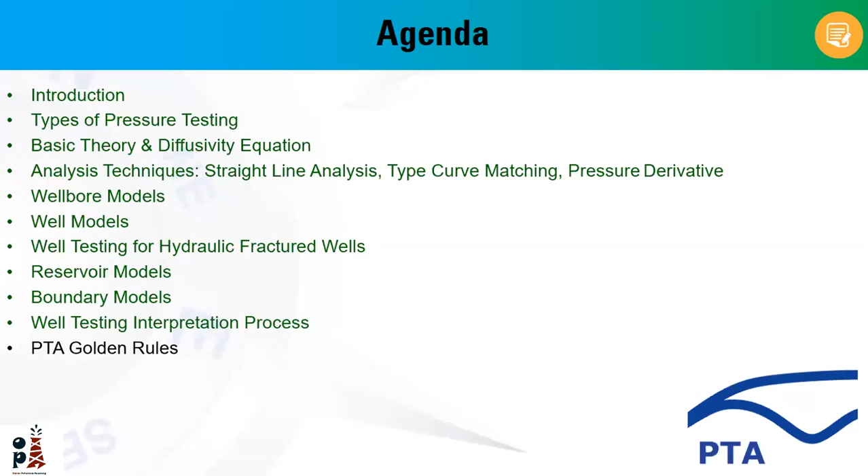After that, the well testing interpretation process and reservoir modeling, what's important to know at this stage, and finally the pressure transient analysis golden rules you have to follow while working in pressure transient analysis and while modeling your pressure data.

So now, what is reservoir engineering? At first, reservoir engineering is basically a branch of petroleum engineering which is concerned with handling the problem of fluid flow in a porous medium.

As you can see, if we consider a unit volume of our reservoir, we have a matrix block and pore spaces in between. Within the pore spaces, we probably have reservoir fluids such as water, oil, and gas.

The basic principles for any reservoir engineering application: the first one is Darcy's law of flow, or the flow rate equation, as we consider fluid flow in a porous medium. So the first principle for almost all reservoir engineering applications is Darcy's law. As we produce from a specific subsurface volume or store, we have to apply the second principle, which is material balance or the continuity equation, such that the remaining volume will be the initial volume minus the produced volume.

And the last one is the equation of state model, or PVT properties. Basically, reservoir fluid properties like reservoir density, reservoir viscosity, and so on are typically dependent on reservoir pressure. So while producing the reservoir, the pressure declines from the average reservoir pressure to the downhole pressure and then to surface or wellhead pressure. So it's important to characterize the properties of reservoir fluids during production using the third principle, which is the equation of state model.

For complete system analysis, as you can see, if we consider the fluid flow from the bottom of the reservoir to the bottom of the well, up the production tubing, and then the wellhead, and as you can see, surface connections, processing facility, separators, and finally transportation.

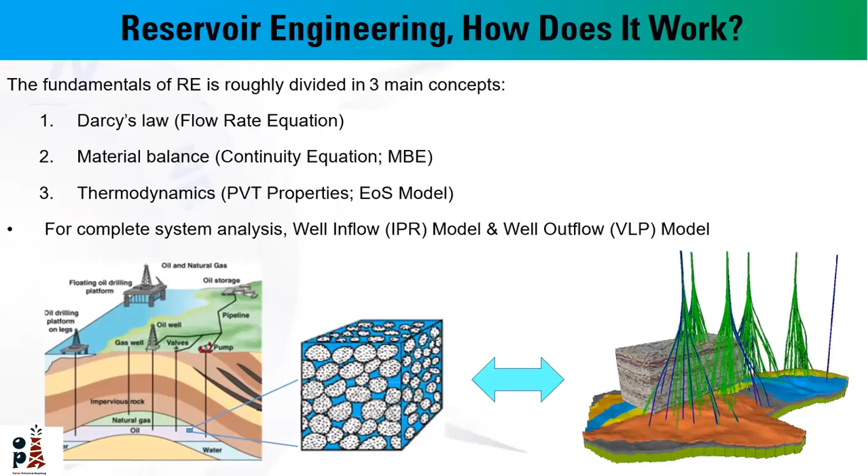We also consider two additional models: the well inflow model, or IPR model, to characterize the movement of fluid from the reservoir to the bottom of the well. And the second model will be the well outflow or VLP model, to characterize fluid properties during production while moving from the bottom of the well to the wellhead.

So again, what is well testing or pressure transient analysis? Simply, it's a signal sent to the reservoir. This signal is created by controlled opening and shut-in of our well, typically using surface control. During the test, we create a pressure disturbance using a specific sequence of opening and shutting in the well, and the response, which is the pressure transient, will be recorded.

So the recorded pressure transient will give us information about the near wellbore region at first, and then the reservoir properties, like reservoir permeability, transmissibility, and so on. And finally, the reservoir boundary in terms of the distance to the boundary, type of boundary, and reservoir connected volume.

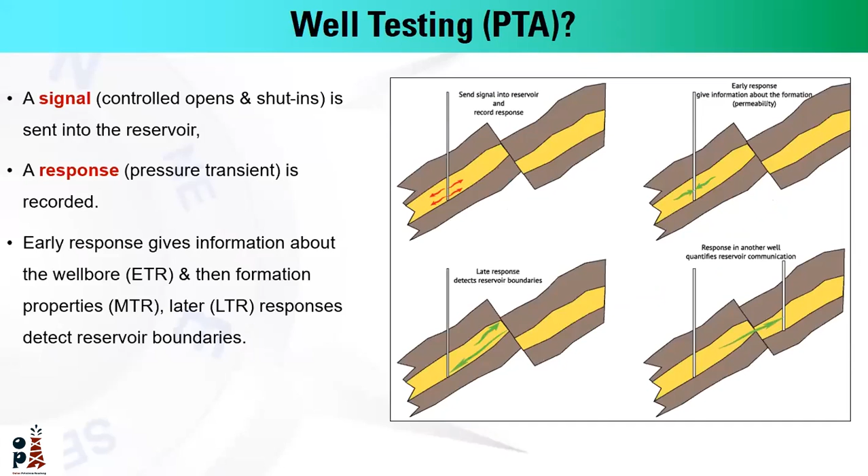So simply, we create a pressure signal by controlled shut-in, build-up, and drawdown. The early signal response gives information about the wellbore and reservoir. A late response gives information about the boundary, and for long test periods, we can see reservoir communication with other wells in our field. So as you can see, we have pressure response recorded versus time, and we have recorded flow rates versus time.

The near wellbore effect is probably relating to wellbore storage and skin, the evaluation of the presence of formation damage, or evaluation of the treatment operations. For the middle time region, we can give more information about the reservoir properties in terms of reservoir heterogeneity parameters, and finally the reservoir boundaries, pressure, shape, and volume.

Applications of pressure transient analysis in exploration involve the determination of reservoir volume by information from boundary response and hydrocarbon type or productivity.

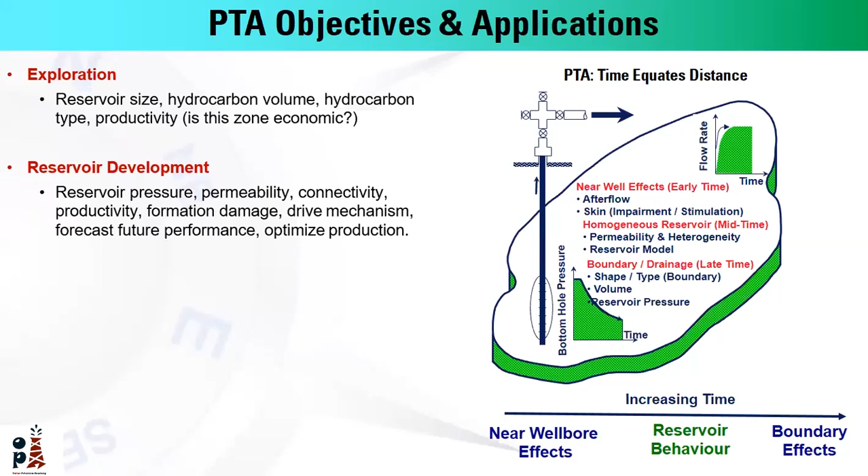Application in reservoir development, which is very important to reservoir engineers, is the determination of reservoir pressure, reservoir properties like permeability, formation damage, and how to optimize production processes by knowing more about the productivity of our wells.

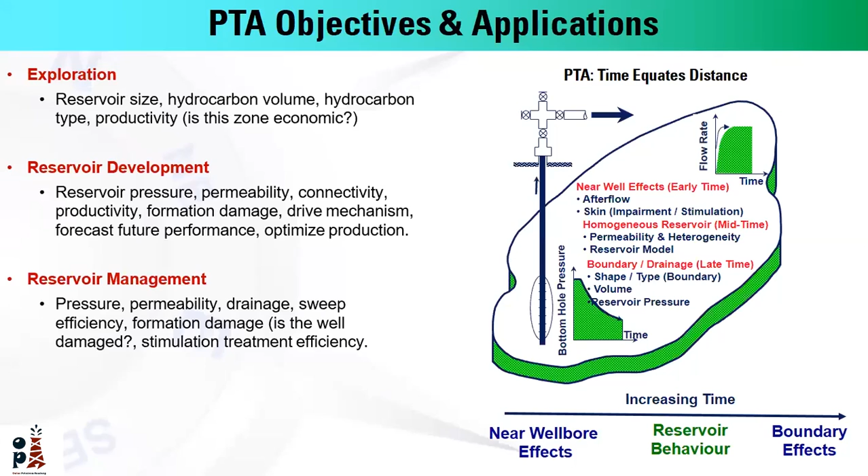And last, in the reservoir management stage, applications of PTA will also include determination of drainage area of our well, evaluation of the stimulation treatment efficiency, and identification of the formation damage.

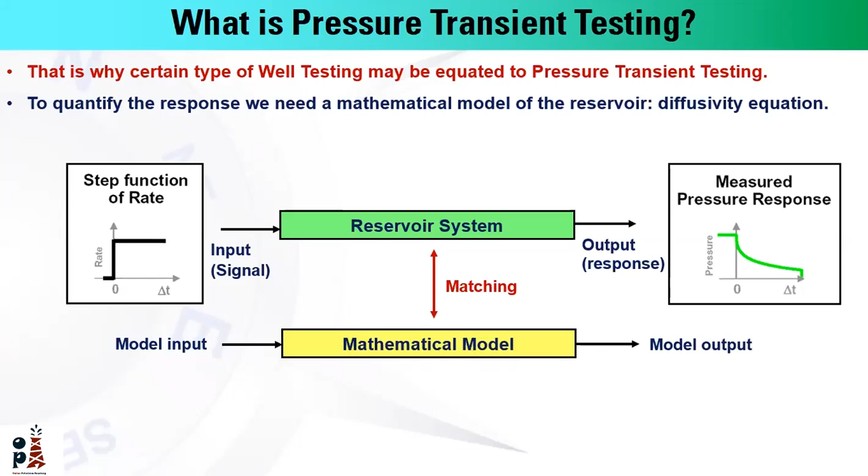Starting from the downhole, we have a main memory gauge to record pressure and temperature versus time. Then at the wellhead, we have a choke manifold and then the separators. On the wellhead, we have different measurements of surface pressure, wellhead pressure, upstream and downstream pressure, fluids, separator or surge tank, and we can also get fluid samples for analysis.

This is the period of testing and acquisition. In the interpretation stage, we almost always have a workstation or specific software like Saphir or alternatives like IHS, and this software is used for loading our data and making the analysis or interpretation of our model.

The main required data for performing a pressure transient analysis is the flow rates, recorded pressure, reservoir fluid properties, and other data like reservoir parameters such as porosity, and well configuration like well radius, and so on.

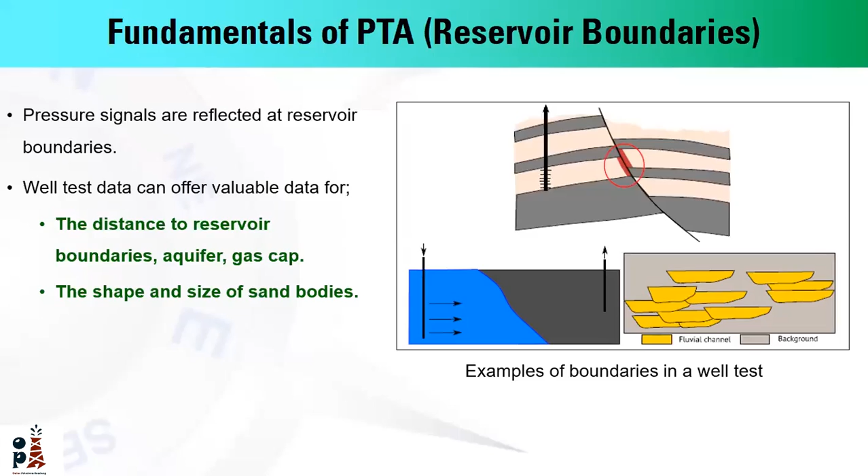The objectives of pressure transient analysis are mainly to evaluate reservoir properties like reservoir permeability, skin, and fracture half-length, and so on, and to get an estimate of the reservoir pressure, whether initial or average. The second most important objective is to get an estimation of the reservoir volume, shape, and boundary distance.

The main inputs for pressure transient analysis will be bottom hole recorded pressure, BHFP (bottom hole flowing pressure) or BHSP (bottom hole shut-in pressure) in case of drawdown and build up respectively, and on surface, we have surface measurements of flow rates. We also need fluid data like reservoir fluid parameters, formation volume factor, viscosity, and compressibility. The last important input is the well configuration and well geometry.

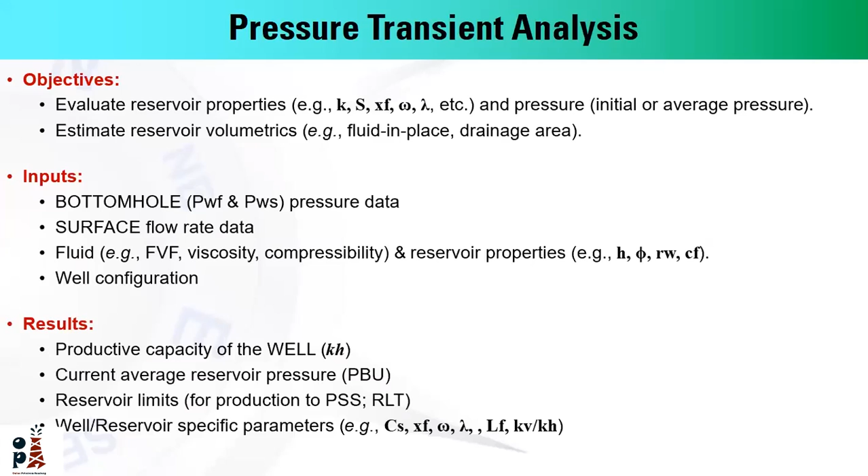The result, on the other hand, will be the identification of production capacity of our well, the estimation of average reservoir pressure, determination of reservoir limits, and reservoir specific or well specific parameters.

Again, our interest is the bottom hole pressure, which is recorded with high frequency and high resolution, almost one pressure recording every 3 or 5 seconds, and surface flow rates recorded on an hourly or half-hourly basis.

This is a simple testing design. We have cleaning at first, after making a perforation of our interval, then a build up interval, and two drawdowns.

Most probably, the commonly used well testing program, as you can see, we have initial flow after cleaning to evaluate the productivity of the well. Then initial shut-in to ensure the reservoir pressure is back to stabilize, or the initial reservoir pressure. As you can see, we have fluids in this curve, and at bottom we have recorded bottom hole pressure. In this period, the pressure is held constant as the initial reservoir pressure, while for the initial flow, we have the first ever drawdown recorded in this well. Then the initial shut-in to ensure the stabilization of our pressure. Then we have a series of increasing fluid or increasing choke sizes, and finally extended flow period to ensure stabilize the flowing condition, and finally final build up to evaluate and make well testing interpretation.

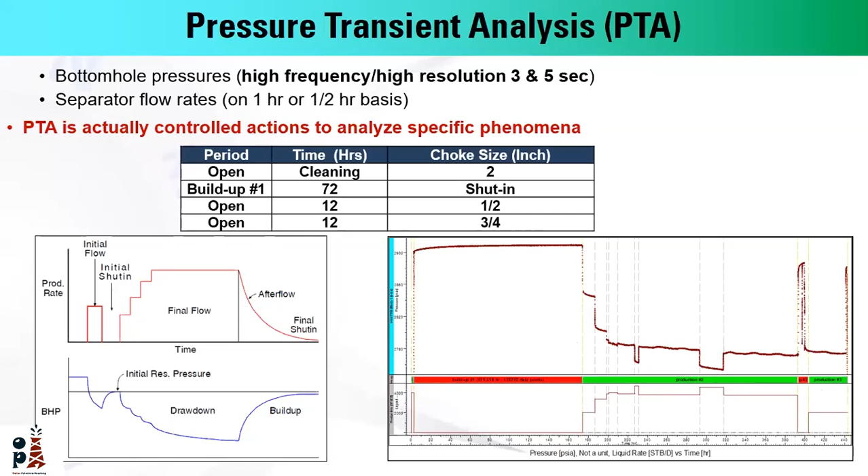The design of well test, as we will discuss at the end of the session, will be dependent of the reservoir fluid type and the required parameters you have to know about your well. Right now, it's important to understand what are the required well testing facility, well testing equipment while performing well testing, while performing pressure transient analysis for an oil well, for example.

So as you can see, this is an overview of surface well testing equipment, starting from bottom to up. We have a completion string equipped with memory gauges to record the pressure versus time, the pressure and temperature versus time. At the wellhead, we have the Christmas tree, then the choke manifold, then flow meters, then a 2 or 3 phase test separator, and then surge tank, and finally to the flare or the burner, as you can see.

So the basic components, the most important surface equipment facility required while performing well testing, are the Christmas tree, choke manifold, flow meter, test separator, and finally surge tank.

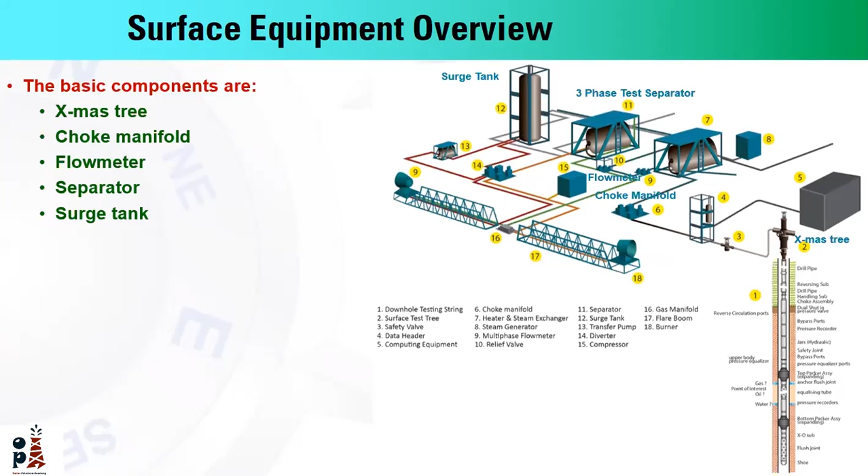Here again, focus on the downhole equipment. We have a packer and memory gauge to record the pressure. As you can see, we have recorded pressure versus time against the production, the formation, the production or tested formation.

And on surface, we have surface measurements after the test separator. We have recorded surface pressure and the surface flow rates.

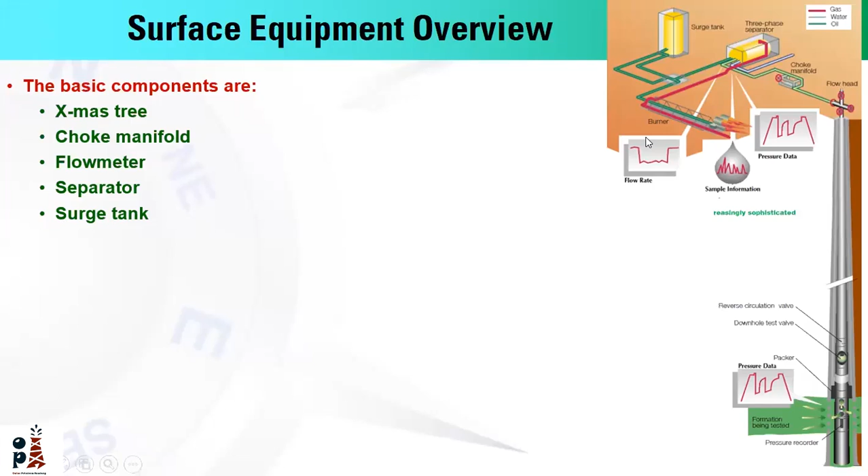The most important surface equipment, starting with choke manifold. The main function of choke manifold is to control the production rate while testing, by using fixed or adjustable choke sizes. So the primary goal is the flow control of the well.

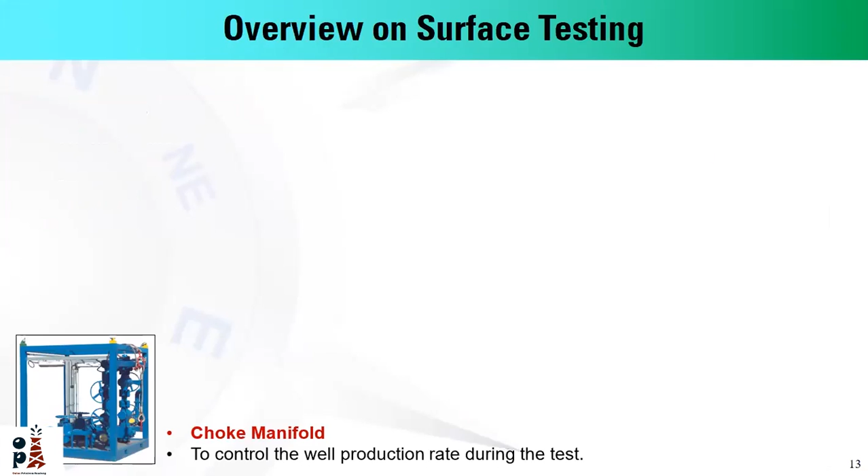The second important surface equipment is the test separator. We probably have at least 2-phase or 3-phase test separator. The main function of this is to make separation and metering for the produced fluid. We almost have separation of water as a separate phase, oil or condensate, and the main function of the surge tank is the flash of any dissolved gas in our liquid, and accordingly identify or determine the correction, the meter correction factor for the measured flow rate.

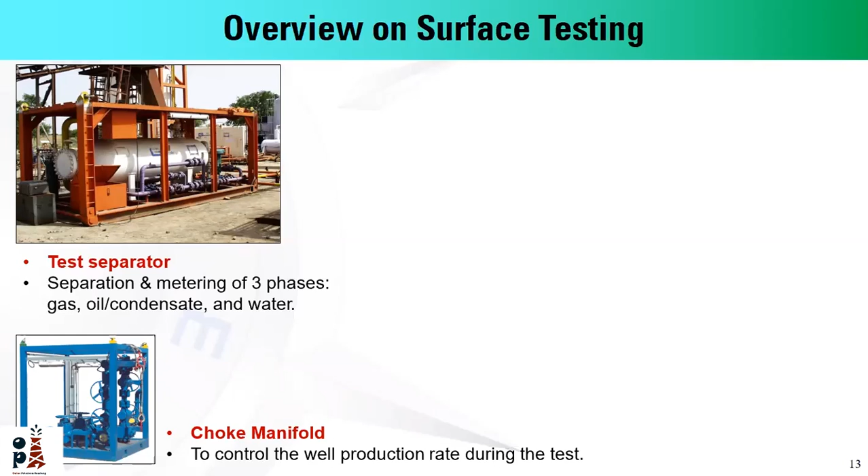And the first test we almost have for production wells is the drawdown test. The drawdown test by definition means we are producing our oil at a constant flow rate starting from time zero after a stabilization of pressure.

And versus time. The second type of well test for production wells is the build-up test. Build-up test simply means shutting in our well after production at constant flow rate and measuring the resultant pressure response versus time.

On the other hand, for injection wells, we have the injection test. Injection test, like the drawdown, while we are injecting water, for example, injecting fluid at constant flow rate starting from time zero and measuring the pressure response versus time.

And similar to the build-up test, we have the fall-off test, injection fall-off test, which is conducted by shutting the well after injection at constant flow rate, and the pressure response is also recorded versus time.

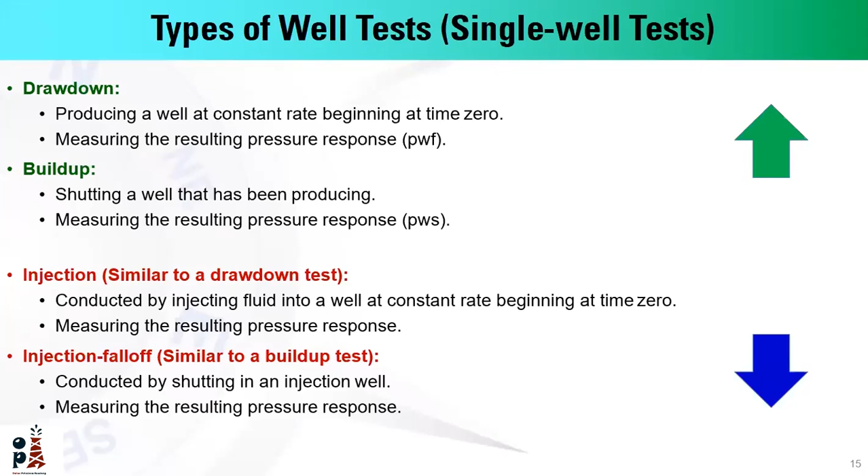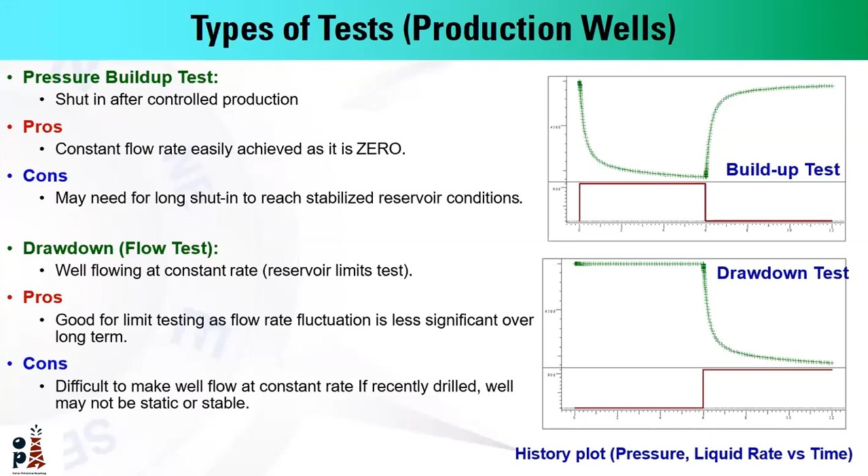While for drawdown, as you can see, we have a stabilization in pressure, and then the drawdown by letting our well produce at constant flow rate. It's a very important test to identify reservoir limits and reservoir volume, but the cons of this is it's really difficult to keep the flow rate constant, held at constant value, because any fluctuation in flow rate will typically distort the pressure transient.

Therefore, in this case, most well testing interpretation will be performed on build-up, due to the data having high accuracy with no noise. It's simply easier to keep your well producing at constant flow rate, which is zero flow rate—it's really applicable to make this, while for drawdown it's difficult to maintain your well producing at constant flow rate.

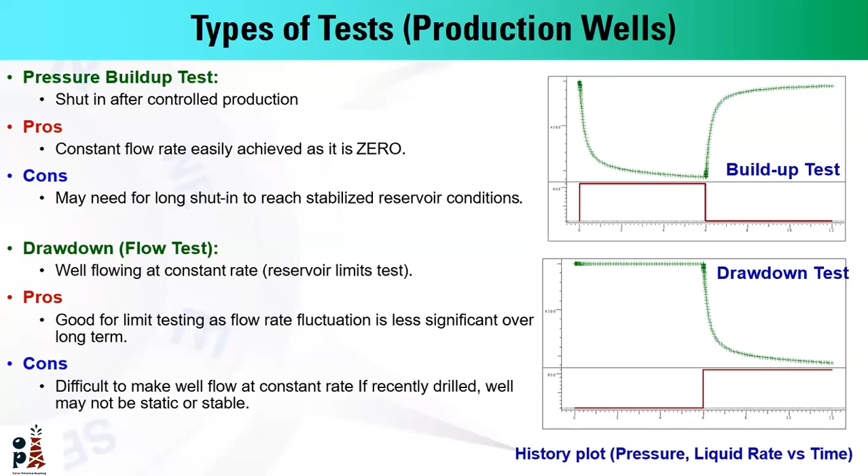So for gas wells, we typically have two different types of tests. The first one is the isochronal test. The isochronal test basically involves flowing our well at different flow rates of equal periods of duration, while the last one will be an extended flow rate to reach stabilization in the flowing conditions.

And in between, we have shut-in periods. The time period of the shut-in will typically depend on the reservoir parameters, and the length of the shut-in period will be designed to let the pressure transient reach the static reservoir conditions.

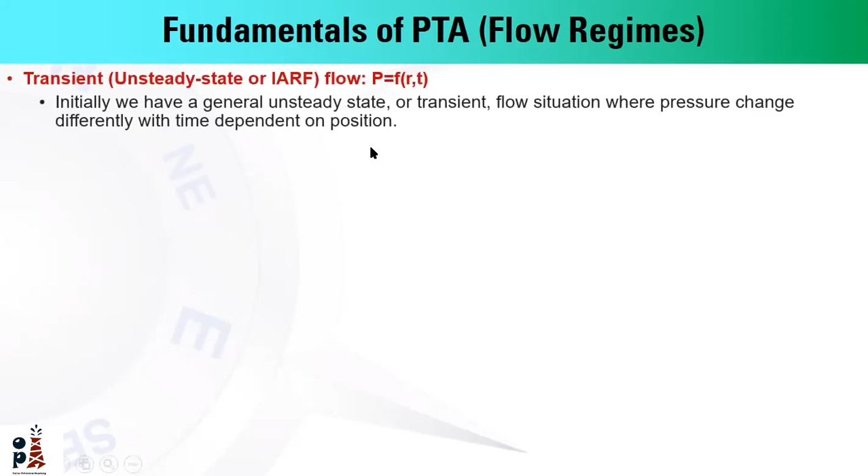The first flow regime for any production well will be the transient or unsteady state flow, in other words, IARF, infinite acting radial flow. In this regime, the relationship of pressure with time, partial P over partial T, will be a function of R and T, function of the radial distance of the well and time. In this flow regime, the pressure transient simply doesn't reach the boundary of our reservoir.

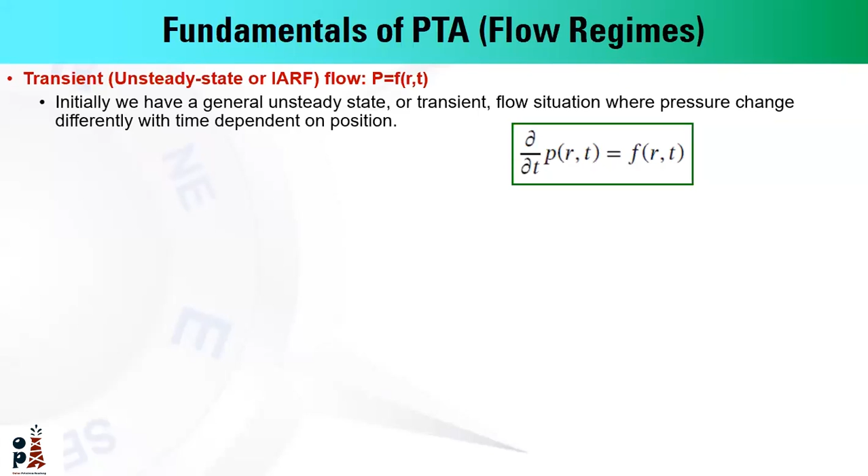The second flow regime is the pseudo-steady state flow. In this regime, the relationship of pressure with time, partial P over partial T, will be constant, which means the pressure changes at every point throughout our reservoir at the same rate. This is very important to identify the reservoir shape, reservoir volume, and reservoir drainage area.

The last flow regime is the steady state flow. In this regime, the change of pressure with time will be zero, meaning no change in pressure with time. Specifically in this type of flow regime, we probably have strong support of reservoir pressure, like a strong aquifer or active pressure maintenance operations like water injection and so on.

So simply we have three different flow regimes applied in well testing interpretation: transient, where partial P over partial T is a function of R and T; pseudo-steady state or boundary dominated flow, where partial P over partial T is constant; and steady state, with no changes in pressure with time.

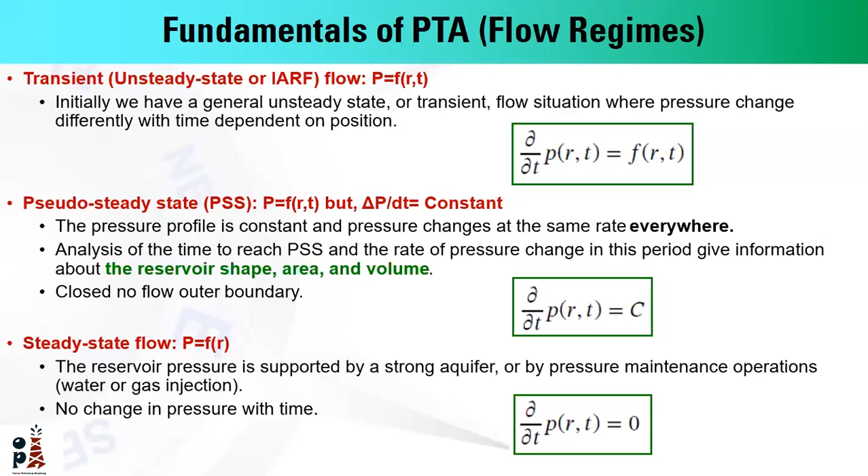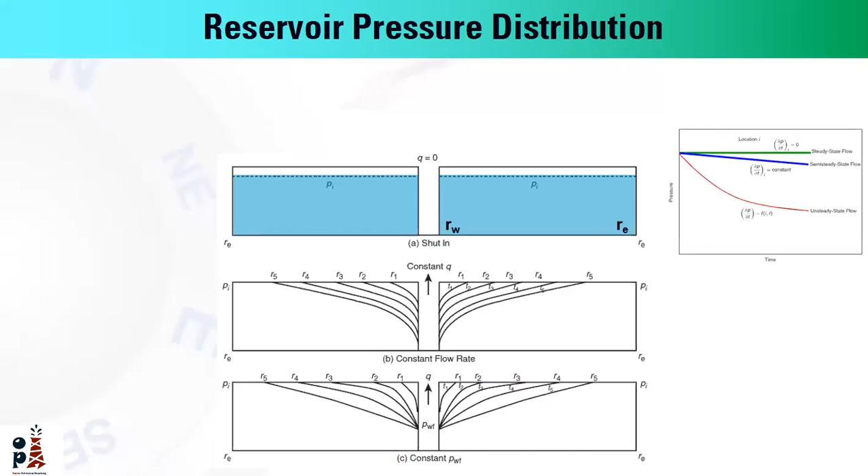If we consider this well is allowed to produce at a constant flow rate, in other words, we are creating a pressure disturbance at the well at the sand face.

This pressure disturbance will move away in the reservoir based on the reservoir properties, and the rate of movement of the pressure transient will typically depend on reservoir parameters like K and phi, reservoir porosity, permeability, fluid viscosity, and total compressibility.

This means at time T1, the pressure transient will reach a radial distance of R1, which is the drainage radius or radius of investigation at this time. At time T5, the pressure transient will reach the radius of investigation as R5, and so on.

As long as the pressure transient doesn't reach the reservoir outer boundary, we are talking about the transient or infinite acting radial flow, in other words, the reservoir acts as if it is infinite in size, meaning mathematically that RE, the outer radius of our reservoir, is infinity.

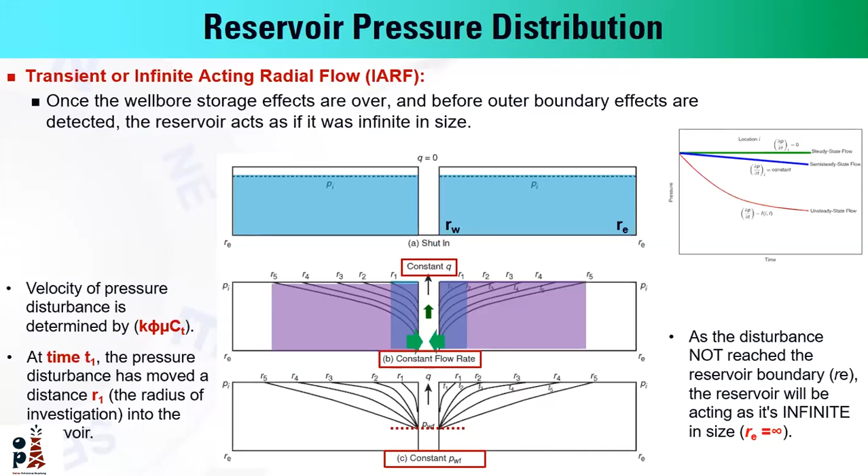The second flow regime is pseudo steady state or the boundary dominated flow. Mathematically this is presented by partial P over partial T equals constant, which means the pressure transient has reached the outer boundary of our reservoir.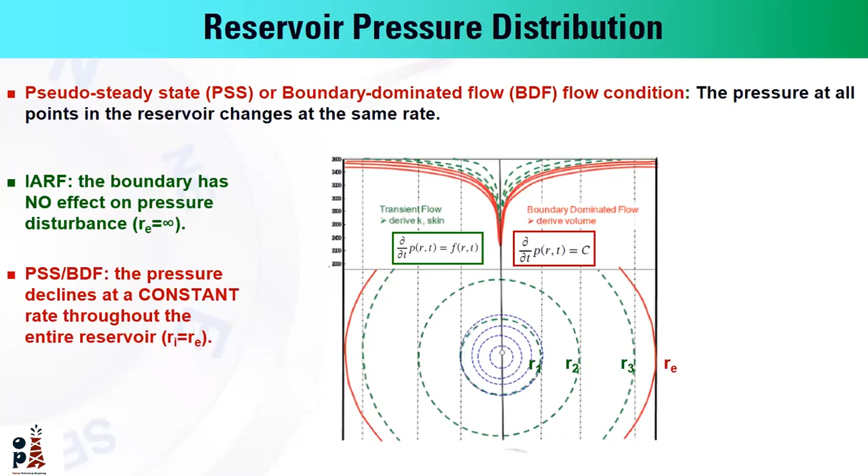So simply, in infinite acting radial flow the boundary has no effect on the pressure disturbance, while in pseudo steady state or boundary dominated flow, the pressure will decline or drop at a constant rate throughout the entire reservoir.

The main flow regime in well testing interpretation is the transient or infinite acting radial flow. It's very important to identify reservoir parameters, reservoir permeability, and the average reservoir pressure, as seen by interpretation of the Horner plot in traditional analysis of well testing pressure build-up testing.

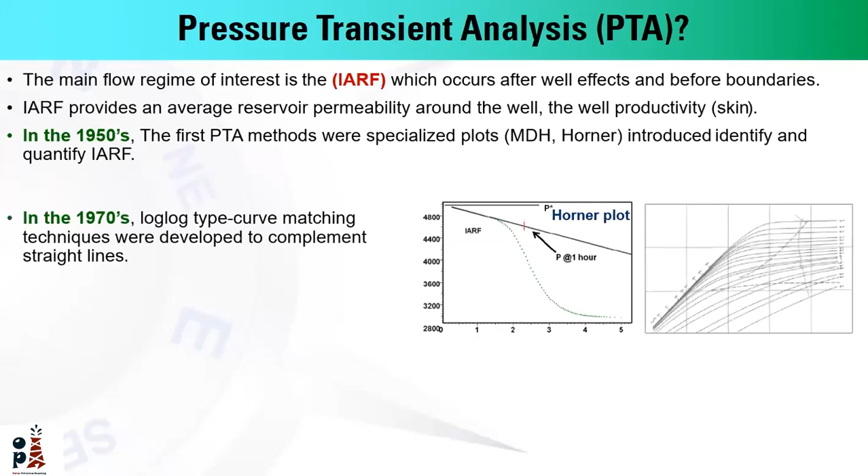In the 1950s, traditional well testing approaches were applied, like Horner plot, MDH, MBH, and so on. In the 1970s came the introduction of type curves in well testing interpretation, which are log-log plots for dimensionless parameters. Most importantly, in 1983 came the introduction of the pressure derivative, which is the main concept for modern well testing interpretation.

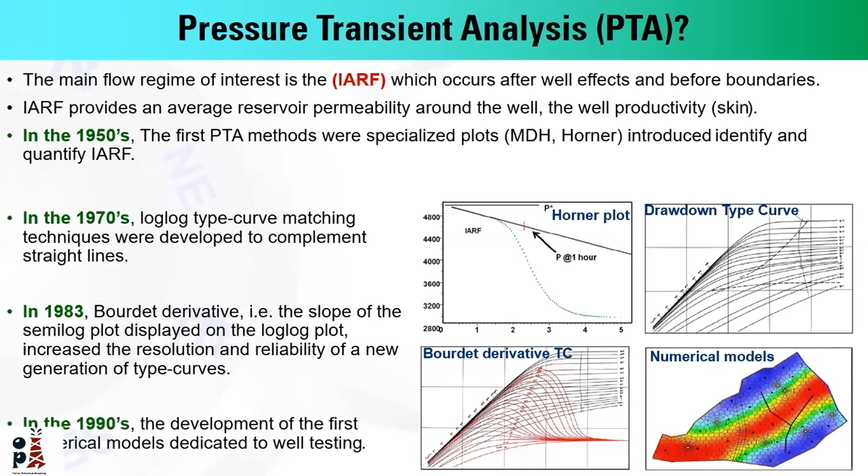We will focus on this part and this part at the end, while talking about the reservoir modeling and well testing interpretation process. And in the 1990s came the development of the first numerical models in well testing interpretation.

Right now, it's important to know the definition of the diffusivity equation. Simply, the diffusivity equation is the mathematical model that characterizes our well testing modeling process, so it's the main flow equation for well testing interpretation. Different assumptions are involved to develop this equation. The most important considerations are that the reservoir is homogeneous, Darcy's law is valid, and we have a slightly compressible fluid with single phase flow.

The main components of the diffusivity equation, like any other reservoir engineering application, are by default Darcy's law for radial flows, the continuity equation or material balance equation, and the equation of state or fluid properties.

Simply, we have the compressibility equation, as you can see, change in volume with pressure relative to the initial volume. By combining the three components together and rearranging, we get the general form of the radial diffusivity equation, as you can see, this form.

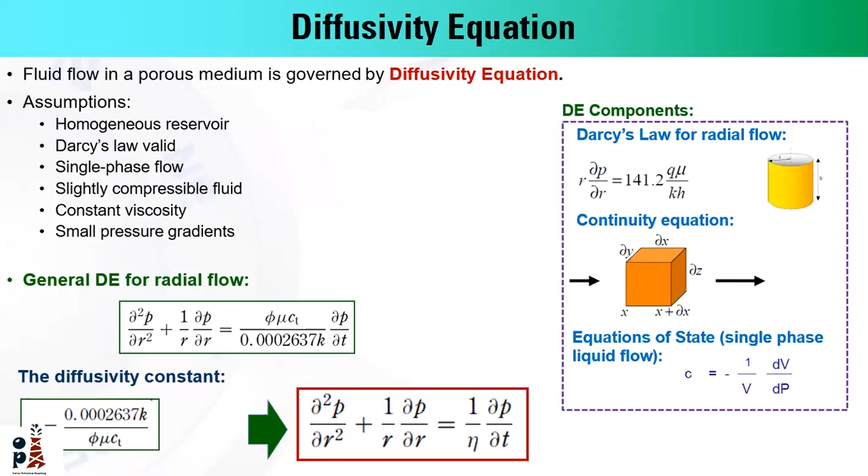So here is the general form of the diffusivity equation, this form. If we consider a steady state flow condition, that means partial P over partial T equals 0, so this term will equal 0. In this case, this will be the form of the diffusivity equation for steady state flow conditions.

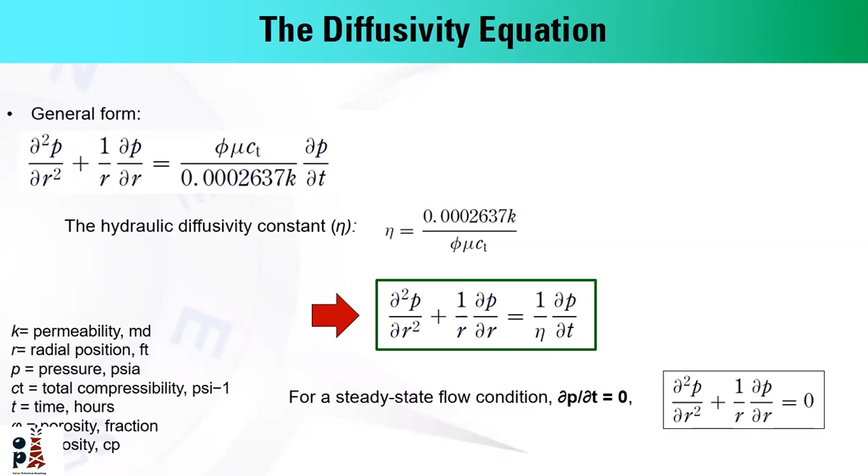Right now, the methodology of pressure transient analysis is to get the solution of the diffusivity equation. Simply, to solve the diffusivity equation, we have to consider two boundary conditions and one initial condition.

The initial condition is typically the initial reservoir pressure at time 0, and the boundary conditions, considering we have a reservoir system, let's say we have the wellbore side and the boundary side. So the first condition is considering the well is producing at constant flow rate, and on the boundary side we are considering we have an infinite-acting boundary.

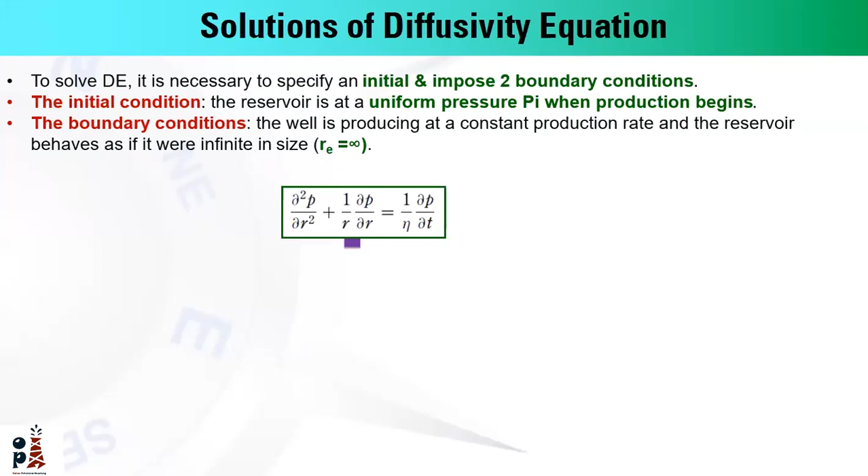Which means we have transient or unsteady state flow condition. So this is the general form of the diffusivity equation.

As you can see, by specifying initial and boundary conditions, we have two common or generalized solutions for this equation: the constant terminal rate solution, which is based on the assumption that we are producing at constant flow rate, and the second one, the constant terminal pressure solution.

This is typically applicable for water influx calculation. We are considering we have support of our reservoir by an external source like a strong aquifer, or even the water injection process or pressure maintenance operations and so on.

More specifically, and most importantly, all well testing and pressure transient analysis techniques are dependent on the concept of the constant terminal rate solution.

In this solution, we have two different types of solution: the EI function solution or exponential integral solution, and the second one, the PD or dimensionless pressure solution.

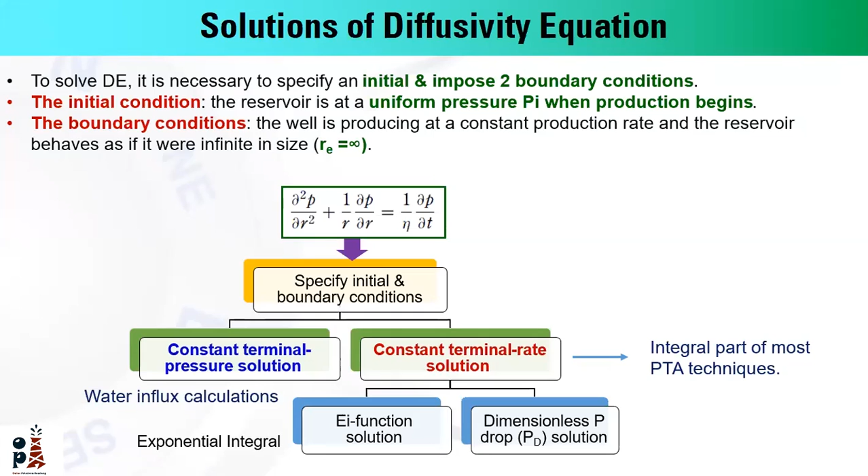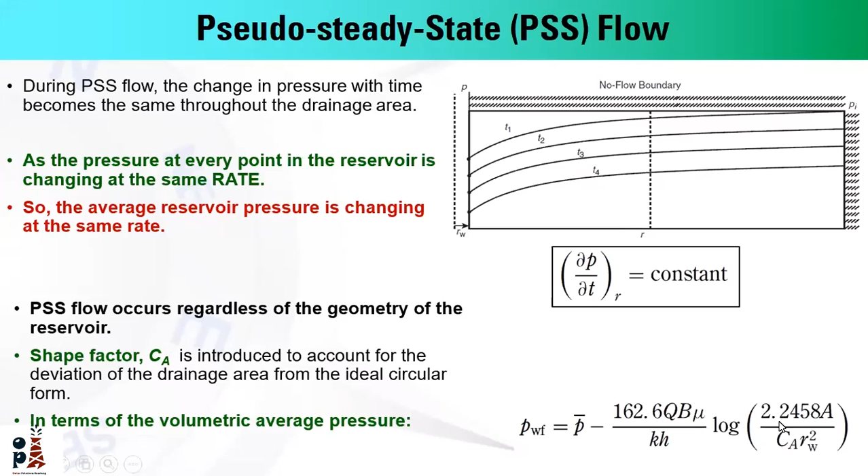And at the end, we will have this relationship of the volumetric average reservoir pressure, and we have the shape factor C, as you can see in this term.

Right now, it's important to know the relationship of pressure versus time. As you can see, if we are considering Cartesian coordinates, the relationship of PWF versus time will follow this shape.

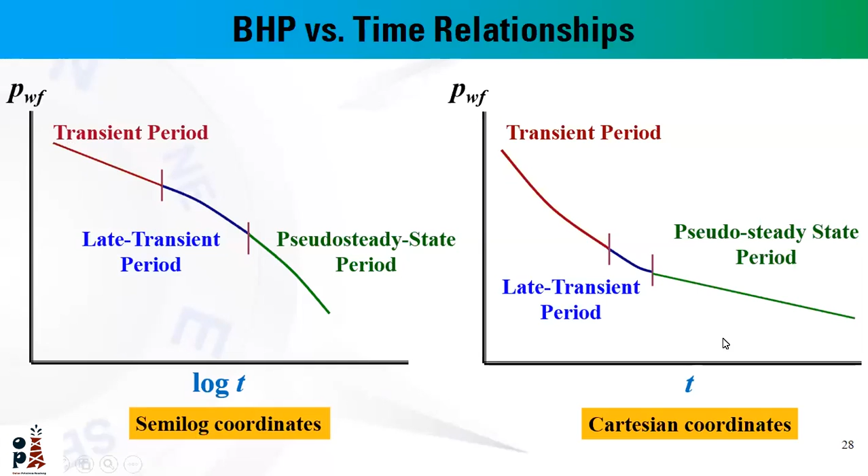Simply for the pseudo-steady state flow, as partial P over partial T is constant, you will typically have a straight line on the Cartesian coordinates during pseudo-steady state flow. For the transient flow period, you have to plot your data on semi-log coordinates, PWF versus log time, since in this case the pressure partial P over partial T will be dependent on, or a function of, R and T. So you will get a straight line during transient or infinite-acting radial flow period on the semi-log coordinates. Unlike the Cartesian coordinates, we have a straight line during pseudo-steady state flow period or boundary-dominated flow period.

Right now, it's important to characterize the existing formation damage and to evaluate the stimulation process using a commonly known parameter, which is skin factor or skin effect.

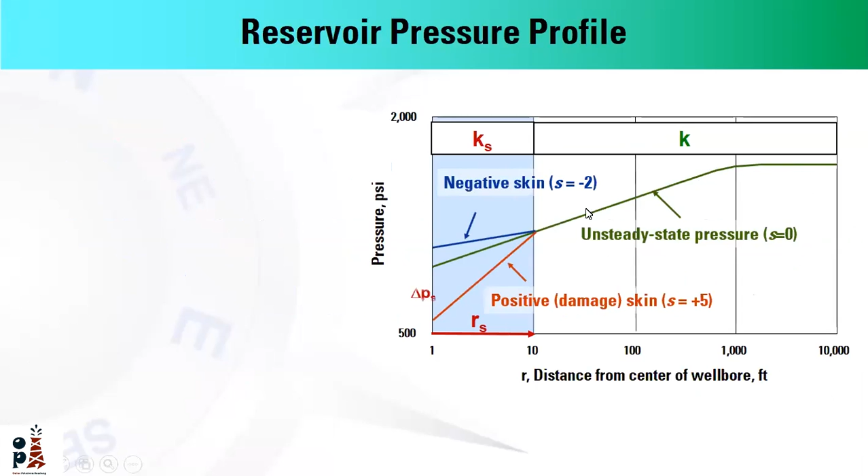As you can see, this is the pressure profile normally for any reservoir without any damage. The pressure starts to decline from the initial or average reservoir pressure, down to a specific bottom hole flowing pressure at this value.

For example, if we have damage in the near wellbore region, this region will be defined as the altered zone of radius Rs, or our skin, and the permeability of this zone will be Ks, while the permeability of the rest of the reservoir will be K.

So if we have actual damage in our reservoir, we will have an additional pressure drop. As you can see, we'll have a reduced bottom hole flowing pressure, and the difference between the normal reservoir pressure profile and the profile in case of damage will be delta Ps, which is the pressure drop due to skin.

Skin is typically the result of invasion of drilling fluids, invasion of cement slurry, or injection processes, or even changes in any localized region around the wellbore. This will create a new or damaged zone, or a bad feature, in the region around the wellbore.

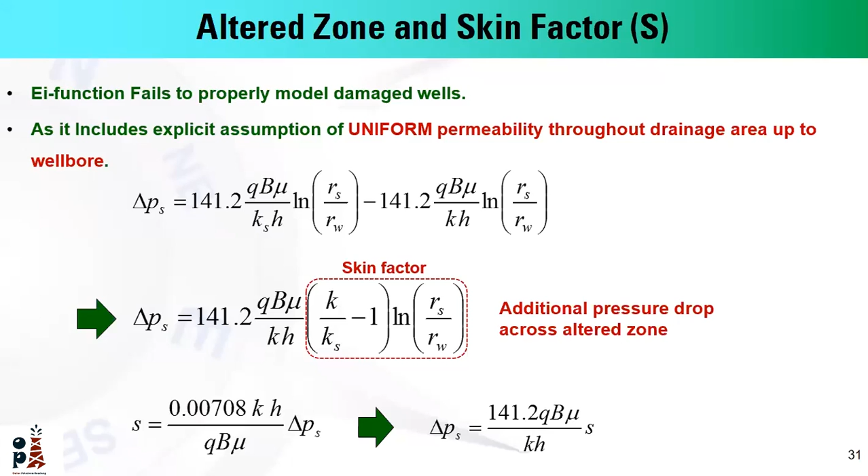So again, another important parameter, which is the effective or apparent wellbore radius. By definition, it's the actual wellbore radius times the exponential of the negative skin effect. Simply, this term is introduced in flow equations for well testing to account for the presence of skin by changing the wellbore radius.

Simply, if we have existing skin damage, this will be simulated by considering we have a smaller wellbore radius. Alternatively, if we have enhancement or stimulation of the near wellbore region, in other words, we have an increase in the wellbore radius, as you can see.

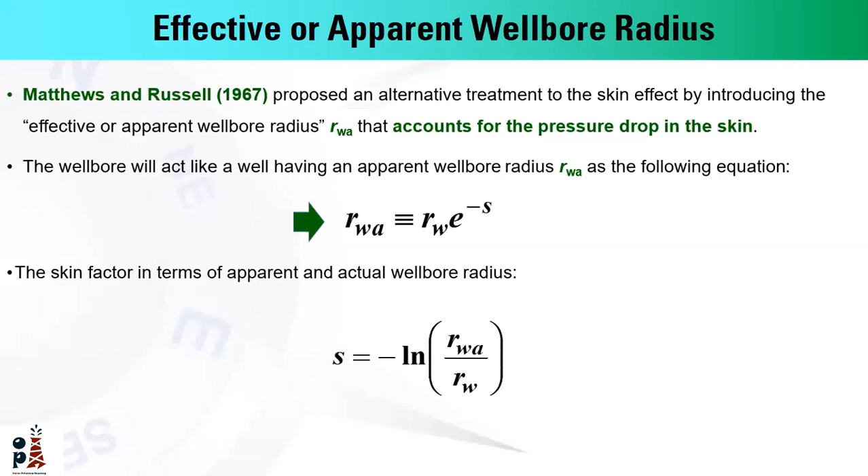Right now, the last two important parameters to evaluate the skin or the stimulation treatment are, typically, the productivity index, which is the ratio of stabilized rate over the drawdown required to achieve this rate. As you can see, it's typically a function of the skin.

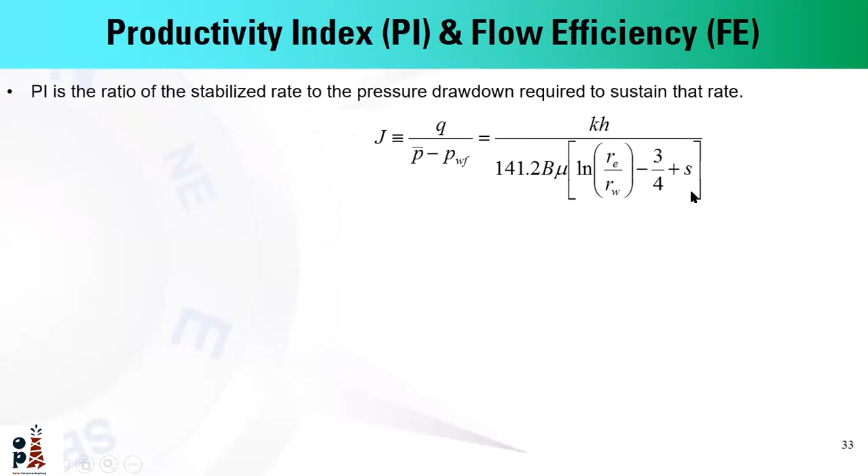And the second important term is the flow efficiency, used to evaluate the skin damage or to evaluate the stimulation treatment. As you can see, it's a ratio of the actual productivity index over the ideal productivity index, which is typically the drawdown minus the pressure drop due to skin.

If we have a positive skin, or existing damage around the wellbore, flow efficiency will be less than 1. Alternatively, for a stimulated well, flow efficiency will be higher than 1, which means enhancement in the reservoir properties around the wellbore.

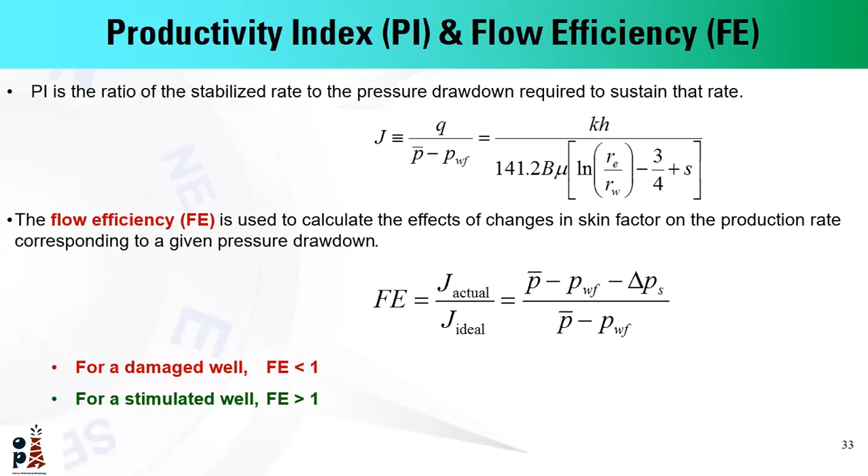Right now, the most important parameter in well testing interpretation is wellbore storage. Wellbore storage, basically in all well testing interpretation, considers the pressure disturbance due to the instantaneous change in rate, for example from 0 to a constant value for drawdown, and change of instantaneous flow rate from a constant value to 0 for buildup.

While in reality this is not applicable, as we have fluid stored in the wellbore. Let's say the bottom hole pressure drops, so the wellbore fluids will expand, and the initial fluid during the drawdown period at surface will be from the fluid stored in the wellbore, not directly from the sandface.

Let's consider this relationship of flow versus time. The diffusivity equation considers an instantaneous change in flow from 0 to a constant value, while in reality we have this shape: a regular increase in the sandface flow until it finally approaches the surface flow. This period of time is dependent on the parameter of wellbore storage.

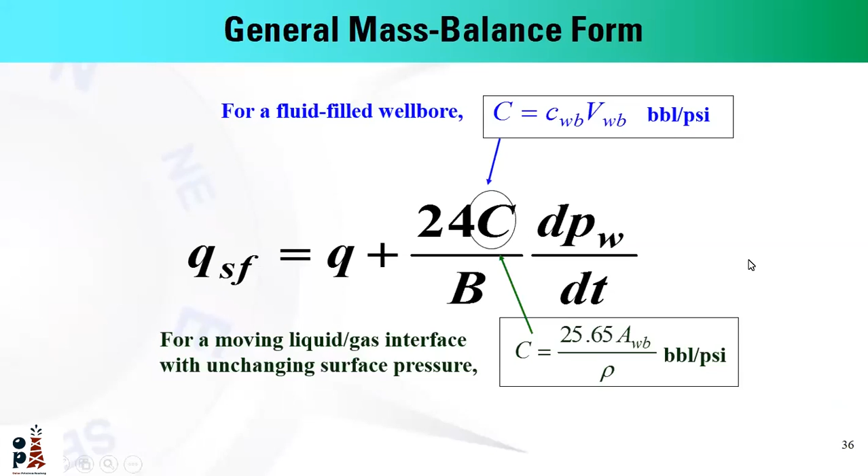Right now, the main principle for all pressure transient analysis is superposition. Superposition simply means accounting for different wells existing in our fields, or accounting for the variable fluid rate.

Simply, pressure transient analysis, via the diffusivity equation and pressure transient analysis techniques, considers we have a pressure disturbance due to production at constant fluid from a single well. But actually we almost always have more than one well producing at the same time in the field.

In this case, the principle of superposition is introduced to account for multiple pressure transients due to multiple wells instead of a single well, to account for variable fluid instead of constant fluid, and to account for boundary effects by introducing the concept of a virtual or image well. We'll discuss this later in this session.

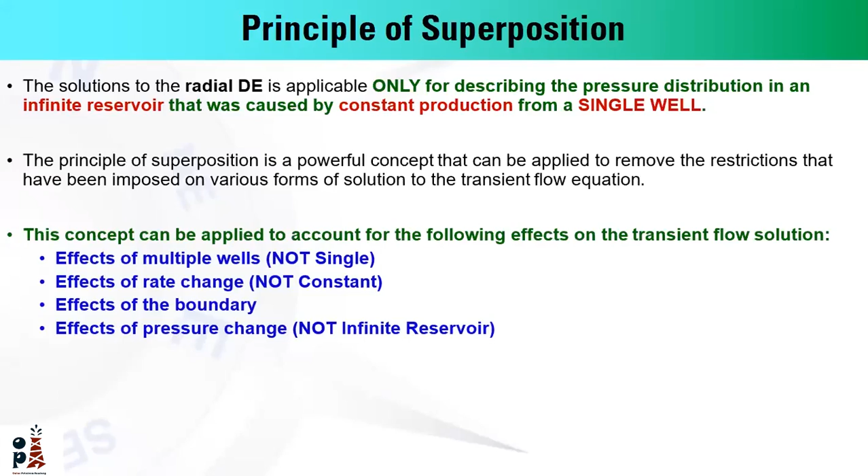The first type of superposition is superposition in space, which is typically used to account for the pressure disturbance or pressure drop due to the production of other wells producing at the same time as the testing well or active well.

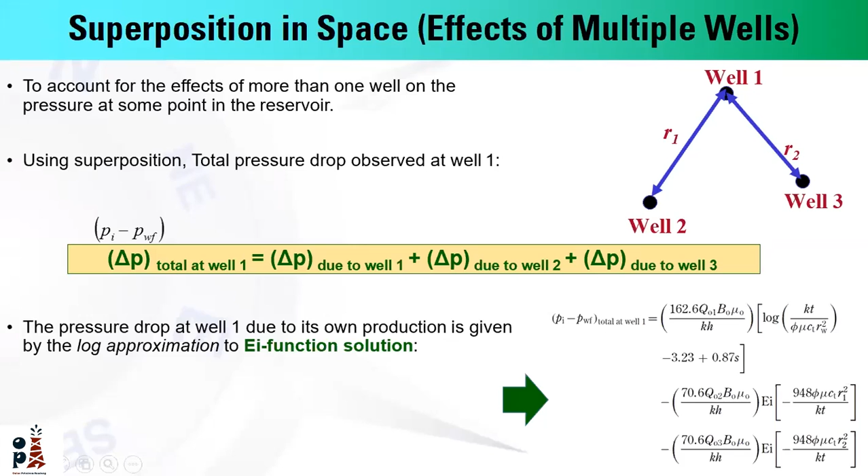By applying the principle of superposition, the total pressure drop at well 1, for example in the case of drawdown, pressure difference Pi minus Pwf will be the pressure drop due to well 1 itself plus the pressure drop due to well 2 and well 3 and so on. This will be the form of the EI function by applying the principle of superposition.

Also, to account for the effect of the boundary, we typically apply the principle of superposition by introducing an image well. We have the active well or testing well at a specific distance L or R from a no-flow boundary, like a sealing fault. This effect is typically simulated by considering an image well or virtual well located at an equal distance from the boundary, producing at a constant rate similar to the active one.

In this situation, the total pressure drop by applying the principle of superposition will be the pressure drop due to the actual well plus the drop due to the image well.

The second type of superposition is superposition in time, to account for changes in flow rate instead of a single flow rate, which is the assumption of the diffusivity equation, the EI function solution, or constant terminal rate. In this situation, the total pressure drop will be the pressure drop due to a change of flow rate Q1 minus 0, plus changes between Q2 minus Q1, and so on.

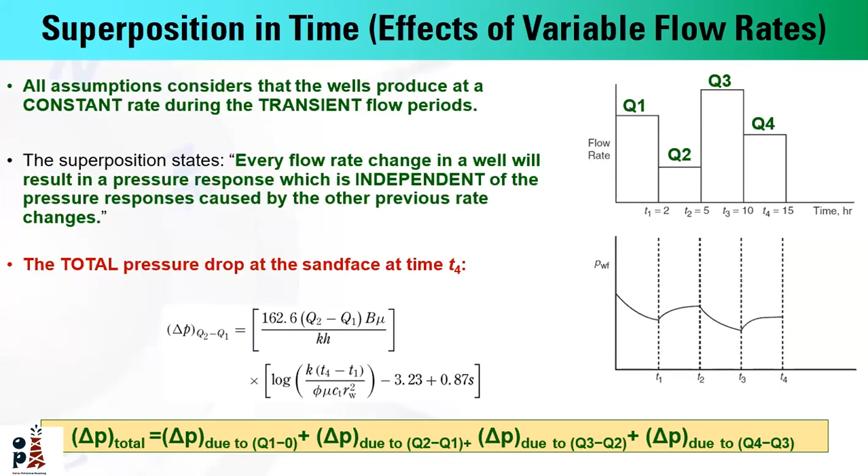Right now we will discuss the principle of type curves in pressure transient analysis and their applications. Simply, type curves were introduced in 1970. They are a graphical representation of the flow equations, typically plotted using dimensionless parameters.

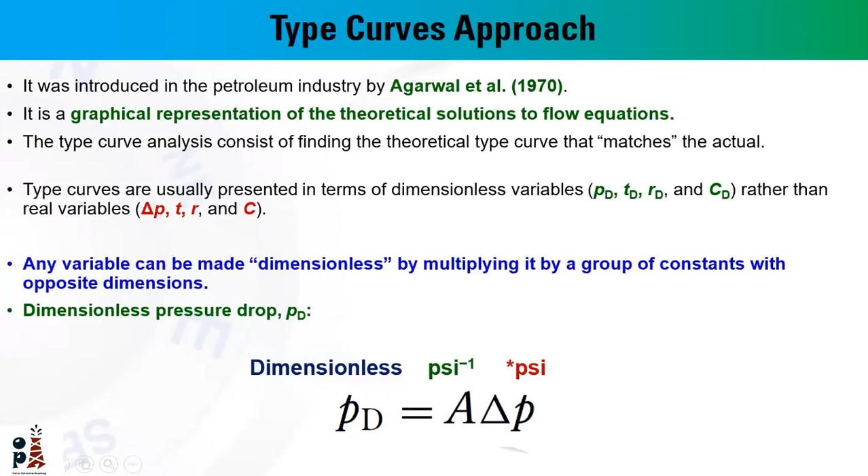Simply, to introduce the dimensionless parameter, if we consider dimensionless pressure like this, the dimensionless parameter will be the pressure itself in units of psi times this group A, or the variable A, which will have units of psi minus 1. So the resultant units of this variable will be dimensionless.

If we have Darcy's law, by rearranging we can get a relationship like this. The dimensionless pressure will be this term times the pressure difference in units of psi. This term typically has units of psi minus 1, so the final units of this parameter will be dimensionless.

This group, as discussed, will be group A. Group A is typically a function of K, H, mu, and B. The most important parameters for this variable, group A, are K and mu, and H, reservoir permeability, fluid viscosity, and net pay.

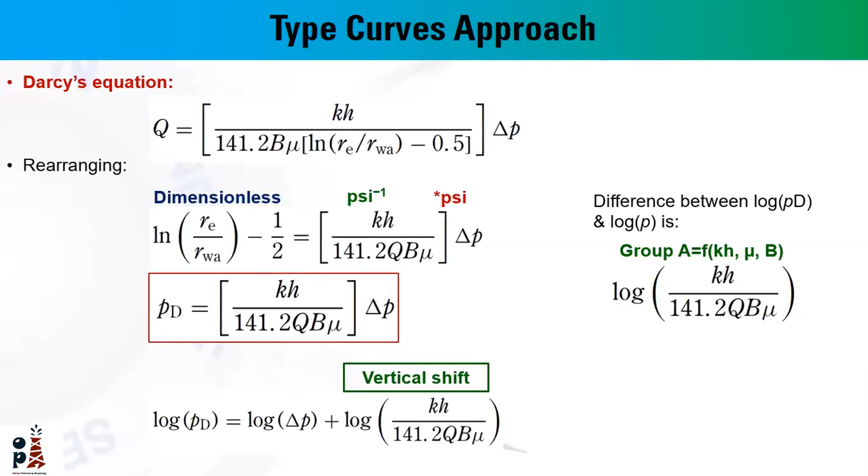Simply, if we introduce the logarithm of both sides, we get this relationship, which represents the vertical shift between log PD and the log of delta P — that is the vertical shift.

Similarly, for dimensionless time, we get the dimensionless time by introducing time times group B. Group B typically has units of inverse hours, and time has units of hours, so dimensionless time will be unitless, and this will be group B.

By plotting dimensionless pressure versus dimensionless time, and if we plot this over the pressure difference versus time, we typically have a vertical and horizontal shift between the two curves. If the two curves are matched and overlaid together, the reservoir parameters will be revealed at the end.

So this is simply the concept of type curve matching, or the type curve approach, which is the main principle for modern pressure transient analysis.

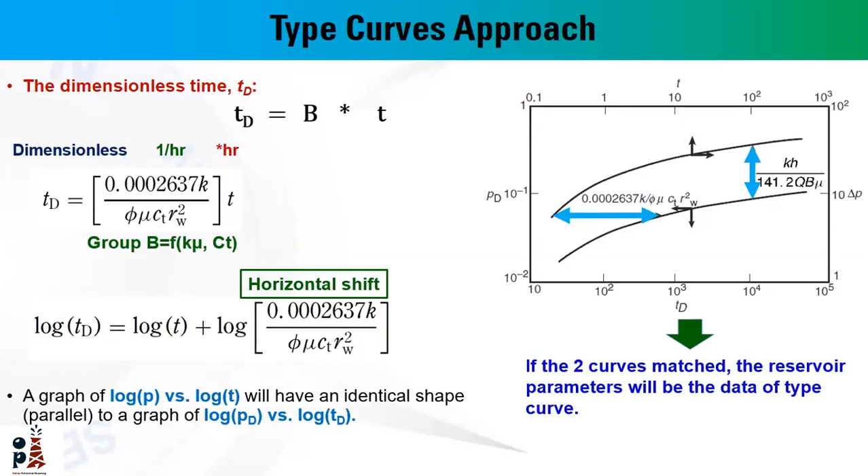Each type curve will have a specific value for this parameter, which is the dimensionless characterization group. So the type curves are plotted on dimensionless parameters, and we overlay our field data to match one of these curves, and finally we get the parameters of our reservoir.

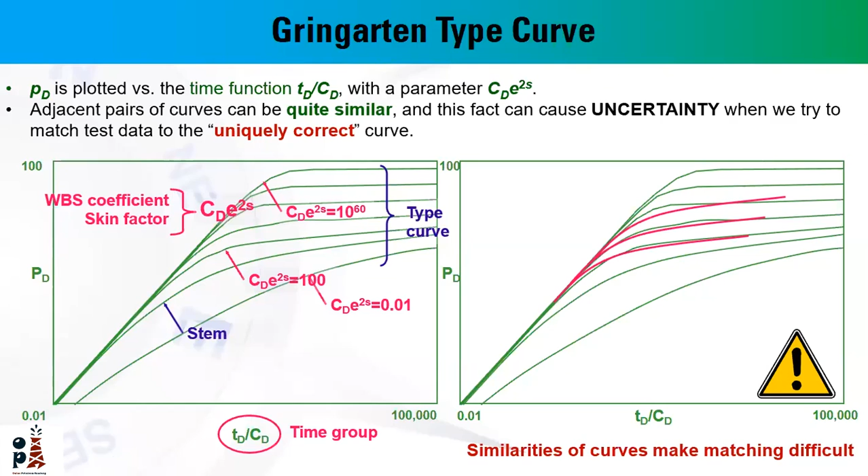So in this case, we typically have large uncertainty in getting the correct reservoir model or the correct reservoir parameters. This is the main problem with the Gringarten type curve.

This issue was typically solved by introducing the concept of the pressure derivative, by Bourdet in 1983, to solve the problem of similarity between the Gringarten type curves, by introducing a new set of curves — the pressure derivative — which improves the matching of field data, eliminates the non-uniqueness of the problem, and confirms we are using the correct reservoir parameters.

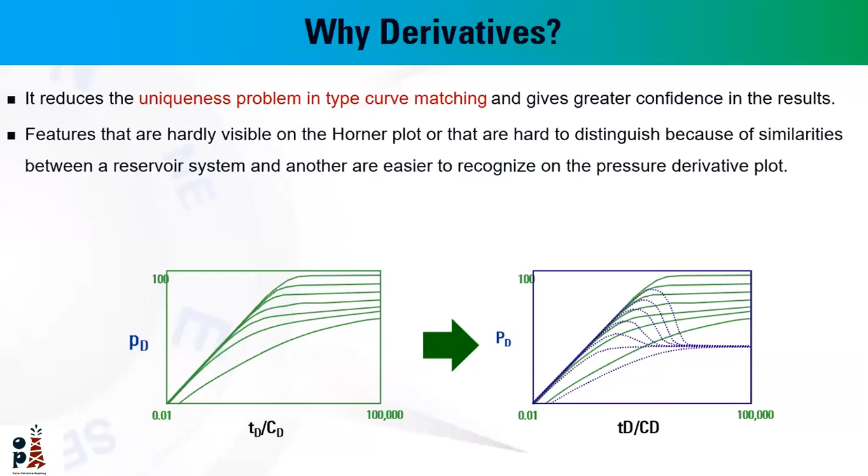So again, the Bourdet derivative, the pressure derivative, was introduced in 1983.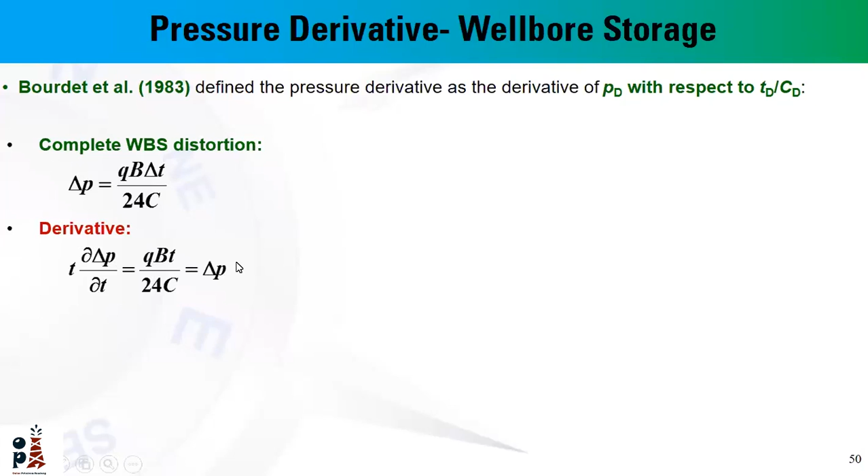During wellbore storage, we have a linear relationship of pressure difference as a function of wellbore storage. So the pressure derivative will be T times partial delta P over partial T. If we take the derivative of this relationship, the result will have the same input, which is delta P. Therefore, during the complete wellbore storage effect, we typically have a unit slope straight line, meaning the pressure derivative and pressure difference curves have a unit slope straight line.

As you can see, during this period, the pressure difference and pressure derivative curve sets will typically have a unit slope straight line. According to this definition of the pressure derivative, even in dimensionless parameters, the dimensionless pressure and dimensionless pressure derivative will have a constant, unit slope straight line like this. So this is the pressure derivative during the wellbore storage effect or wellbore storage period.

Next, during the infinite acting radial flow period, we have this flow equation. If we consider the pressure derivative, again T times partial delta P by partial time, we'll have this constant, as you can see. So the pressure derivative will be flat or constant during infinite acting radial flow. This stabilization level typically depends on reservoir parameters K, fluid parameter mu, the production rate, and the perforation interval. So it's important to know the pressure derivative during infinite acting radial flow will be constant at a specific stabilization level dependent on reservoir and fluid parameters.

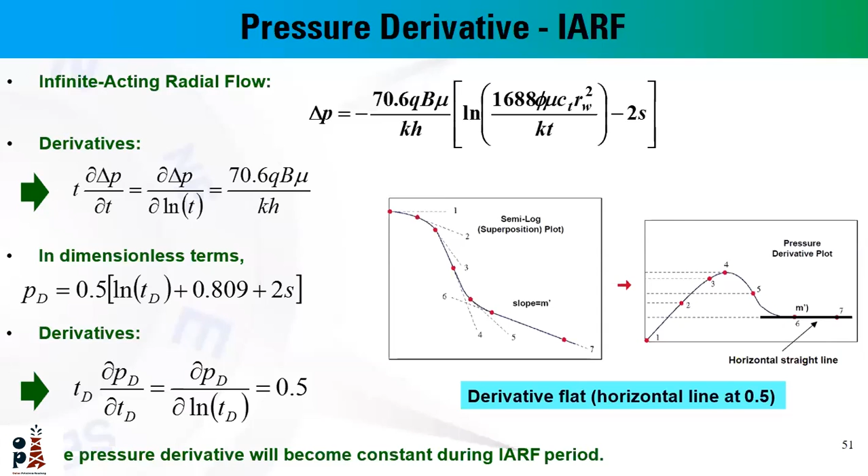By definition, the pressure derivative is the slope of the semi-log plot, plotted on the log-log plot like this. So here we have a semi-log plot of delta P versus time. The slope of this is simply the pressure derivative, by applying this definition. So on the log-log plot for pressure difference and pressure derivative, during the infinite acting flow period, the pressure derivative will be flat or constant during this flow regime.

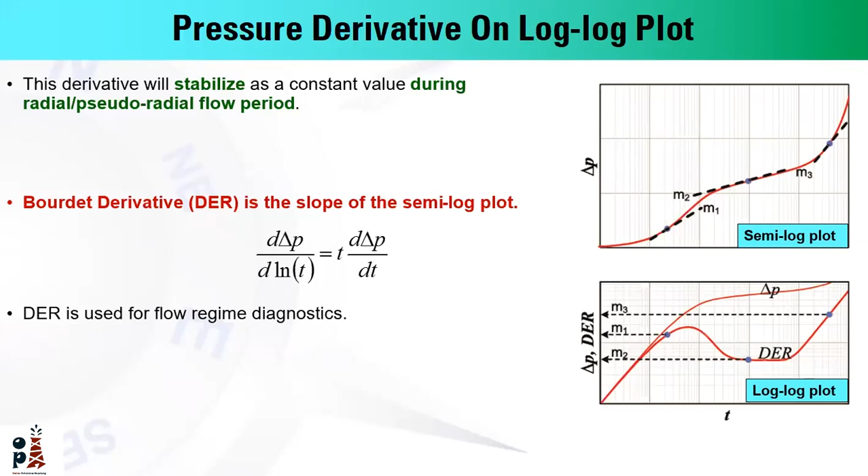The pressure derivative is most important to characterize reservoir parameters and identify different flow regimes, and to make different pressure diagnostics of your recorded pressure versus time. The main gain from applying the pressure derivative is to have a clear signature of your reservoir and eliminate the similarity of type curves by introducing new sets of curves for the pressure derivative. We typically have three different periods of our reservoir during pressure transient.

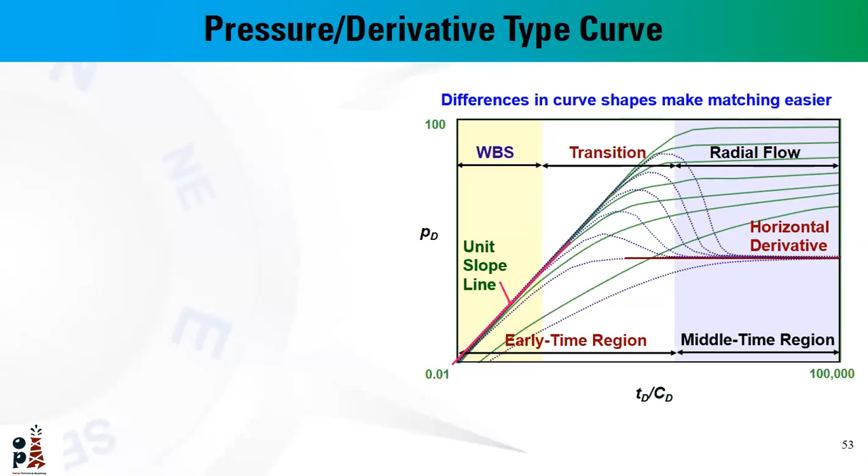Yes, I think we passed our time. We should have some minutes for the Q&A session, so if you can stop here, maybe. Okay, so I will ask you the questions. We have them. Okay Omar, let me finish this part, I almost need five minutes. And I apologize for being late.

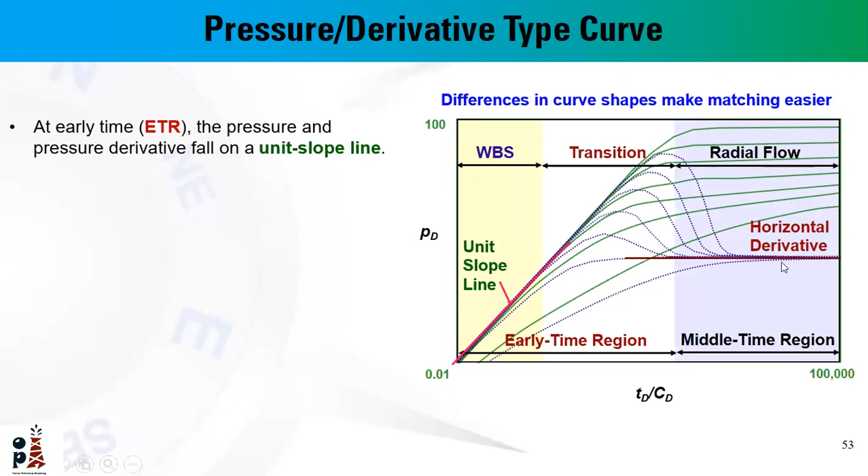So we have early time and middle time regions. The early time region is typically dependent on wellbore parameters at the starting or early time. We have a unit slope straight line for the wellbore storage flow period, then a specific transition, and finally for middle time, a stabilization level for the derivative, as you can see, for infinite acting radial flow.

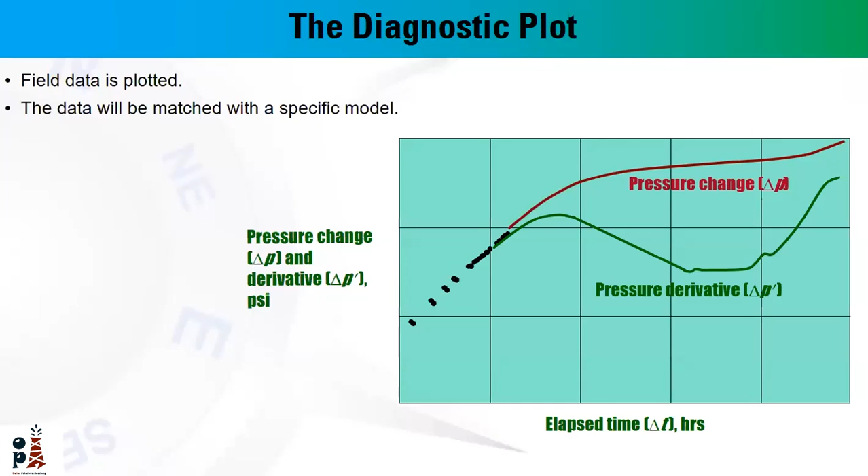Simply, in the pressure transient interpretation process, the field data is plotted first, and then we match our data using a specific model and specific parameters of the pressure difference and pressure derivative curves. We can make an evaluation for our reservoir according to three different periods: early time, middle time—which is typically for reservoir parameters and a good estimate of reservoir permeability and transmissibility—and finally late time, for identification of reservoir boundary effects.

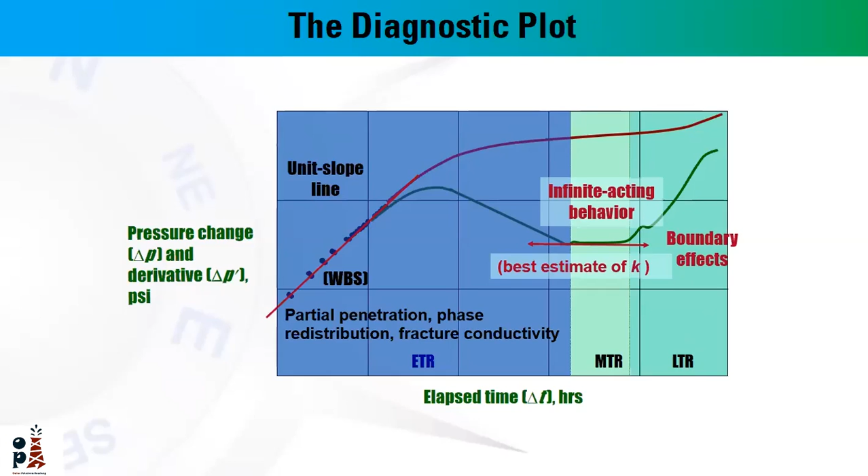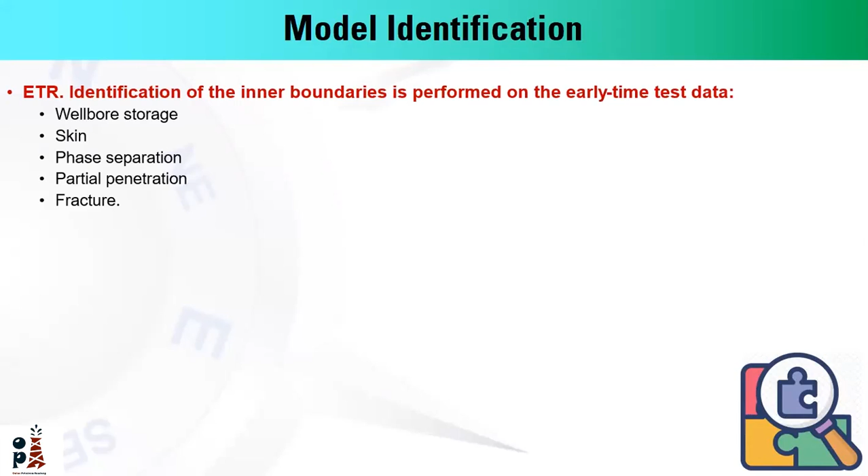Let me skip this. Right now, reservoir modeling process and pressure transient interpretation. Simply, the pressure transient interpretation process passes through three different periods. Early time period is the identification of the inner boundary of our system, which means we may have wellbore storage, skin, partial penetration, or hydraulic fracturing, and so on. The next period is the middle time region, the identification of reservoir parameters and reservoir heterogeneity—we probably have a homogeneous or heterogeneous reservoir in terms of specific corresponding parameters. Finally, the late time region is the identification of reservoir boundaries. We typically have no-flow boundaries or constant pressure boundaries according to the pressure response as our boundary—we have a closed system or pressure support.

In a modeling process, it's important to get a match on the log plot, as you can see, and the history plot. A good match of build-up doesn't necessarily make a good match on drawdown. As you can see, we have a perfect match in this model in the build-up period, while the match of the pressure history of the drawdown, or even this build-up period, is not good enough.

So in this case, it's important to know the model is most probably wrong, as models are a mathematical simplification of the complex reservoir condition and complex depositional environment. A second reason for this, you probably use not-accurate measurements of flow rate, specifically during drawdown. Or, the third reason, you probably have a problem in the nonlinear equation to match your data.

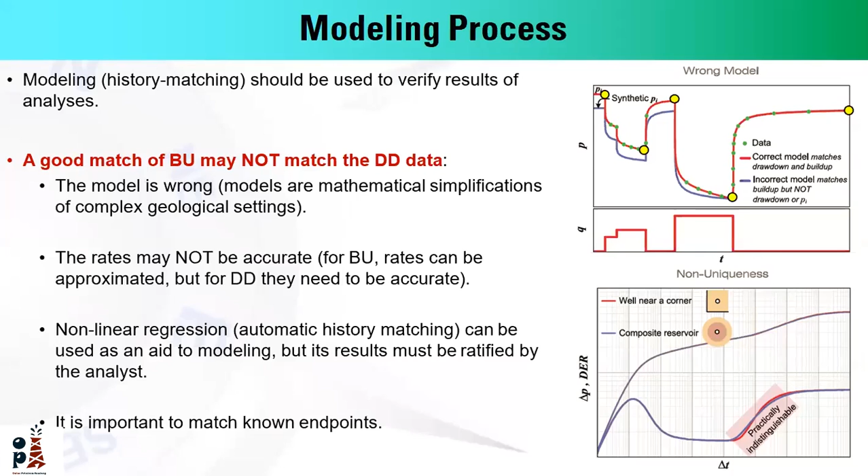Also, your data may be matched using different models. As you can see, this data is matched using two intersecting faults or a composite reservoir. So in this case, it's important to integrate other disciplines into your matching results to get more applicable test results, in terms of geology, physics, and even geophysics, to ensure you have applicable test results.

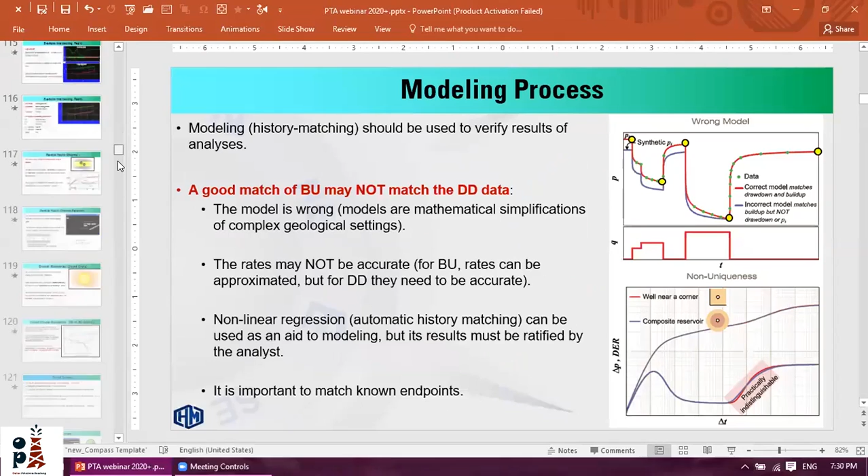So I will stop right here. I just want to go through the last, most important part, which is the pressure transient analysis golden rules you have to know while performing any transient pressure testing.

The first one is: what happens suddenly is typically not a reservoir effect. You may have a problem in your recorded pressure, a problem in your memory gauge while recording. The second rule is: the longer the flow period, the more information we can get from the pressure transient analysis test.

Endpoints are the guide of your interpretation, like the initial reservoir pressure. The fourth one, which is most important, is that what the recorder or memory gauge sees is not always what the reservoir sees. It's important to consider the differences between the location of your memory gauge and the producing formation. Wellbore transients, like wellbore storage, may mask the reservoir transient.

Also, when possible, it's important to use pressure gradient stations before and after your test. And another important rule: the software or computer is only a calculator to perform specific calculations to solve specific flow equations, but it's not the interpreter. You are the interpreter for the test.

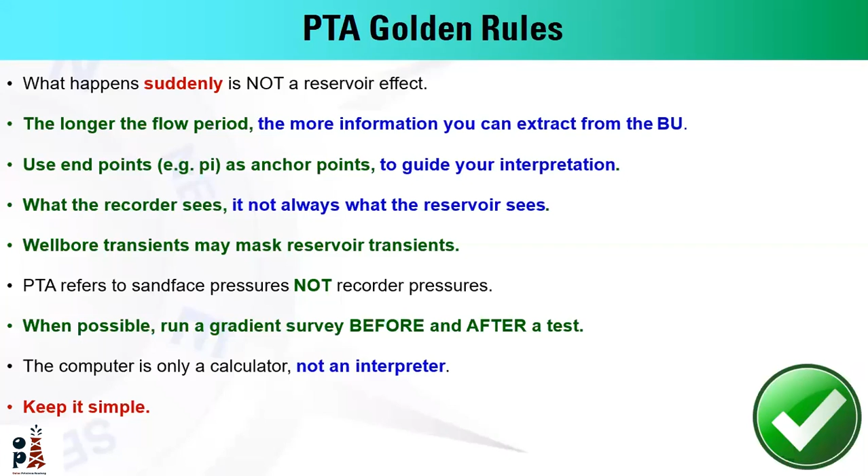Okay, Engineer Hisham, the first question is: why do we need a temperature measurement tool in well testing? Again, Omar, the objective of the temperature? Yes, why do we need the temperature measurement tool in well testing?

Typically, memory gauges record pressure and temperature with time. In pressure transient analysis, our interest is pressure versus time. In other situations, or most probably in normal operations, we use the temperature measurements as a reference of the reservoir fluid temperature, to compare it with other measurements, like the temperature recording while, for example, making fluid samples. So it's an important measurement for other applications, not for pressure transient analysis interpretation itself.

Okay, thank you. The second question is: what's the function of the three-phase test separator? Again, the function of a three-phase test separator is to separate and meter the produced fluid.